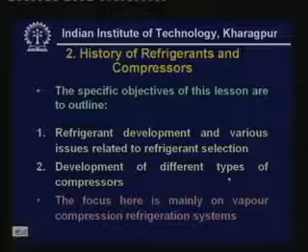The specific objectives of this lesson are to outline refrigerant development and various issues related to refrigerant selection and development of different types of compressors. Here the focus is mainly on Vapour Compression Refrigeration Systems, which are the most popular among all the refrigerant systems.

At the end of the lesson, the student should be able to list various refrigerants used before CFCs and their limitations, list various CFCs and their impact on refrigeration and environment, list refrigerants in use after the Montreal Protocol, and list various types of compressors and their development.

Refrigerant - first of all, let me define refrigerant. A refrigerant is defined as any body or substance that acts as a cooling medium by extracting heat from another body or substance. This is a general definition of refrigerant, and under this broad definition, many substances can be called refrigerants. For example, if you are using a block of ice for cooling, then the ice can be called a refrigerant.

But since we are interested mainly in closed refrigeration cycles, for us refrigerant means a working fluid that undergoes cyclic changes during the operation of a refrigeration system. So basically we are dealing with working fluids which undergo cyclic changes.

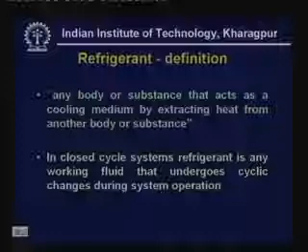Now let us look at the importance of refrigerant selection. In the design of any refrigerant system, selection of a suitable refrigerant is a very important step, and it is in fact the first step in the design of any refrigerant system. Even though the theoretical efficiency of a Vapour compression refrigeration system depends mainly on the operating temperatures, the selection of a refrigerant decides many other practical issues.

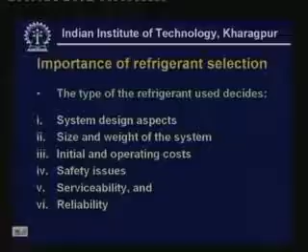For example, the type of refrigerant used decides the system design aspects, size and weight of the system, initial and operating costs, safety issues, serviceability, and reliability. So you can see that so many practical issues are related to the selection of refrigerant. That is the reason why suitable refrigerant selection is very important.

Now let us look at refrigerant development. The development can be divided into three distinct phases. The first phase is the development of early refrigerants, prior to CFCs. The second phase consists of development of chlorofluorocarbon or CFC based refrigerants, and the third phase is refrigerants after the Montreal Protocol.

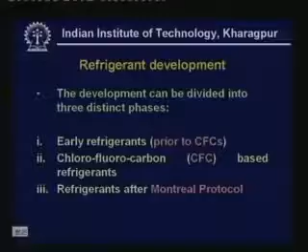Let us look at early refrigerants. As I mentioned in the last class, ethyl ether is the first refrigerant to be used by Jacob Perkins and others in their early refrigeration machines. Ethyl ether was used not because it is an ideal refrigerant, but because it exists as a liquid at ambient conditions, so it is easier to handle. That is the reason why it was used as a refrigerant.

But if you remember, I mentioned that ethyl ether has several problems. For example, if you want low temperatures, then your system will be operating under vacuum, and operation under vacuum can lead to leakage of air into the system, which may form explosive mixtures with ether. So that is one of the main disadvantages of ether. In addition to that, ether is also toxic.

As a result, people tried to develop new refrigerants which do not have these shortcomings. So Alexander Twining proposed the use of ammonia and carbon dioxide as refrigerants in 1850, and ammonia is one of the most important refrigerants because of its excellent thermodynamic properties and low cost, and also because it is easily available.

Next, Charles Tellier tried dimethyl ether in 1864. Dimethyl ether has a low normal boiling point. However, it is also toxic. As a result, that was also not used for a long time.

Next, Raoul Pictet suggested the use of sulfur dioxide. In fact, he built several systems using sulfur dioxide. Sulfur dioxide is not an inflammable substance; in fact, it is a flame retardant. In addition, it also has the advantage that it acts as an auto lubricant, so when using sulfur dioxide in a compression system, you do not need any external lubricant.

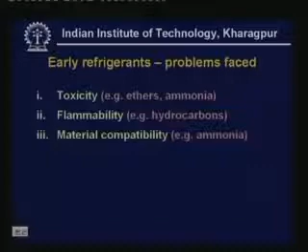They had the problem of flammability, particularly with hydrocarbons. Hydrocarbons are highly flammable, so this is one of the problems. And material compatibility - ammonia is not compatible with copper, brass, etc. So you cannot use these materials when you have ammonia in the system.

Then chemical stability - as I mentioned, refrigerants like sulfur dioxide react with water and form sulfuric acid. So sulfur dioxide is not chemically very stable.

Then operating pressures - this is one typical problem with carbon dioxide. Its operating pressures are at least one order of magnitude higher than other refrigerants. That means your system pressures will be very, very high, so you have to design the system to withstand such high pressures. This is one disadvantage of carbon dioxide.

Then limited temperature range - almost all the refrigerants had a particular temperature range within which they were working, and outside that range they were not good. So these are the typical problems of all the early refrigerants.

As a result, the refrigeration industry felt that to make progress, they needed to develop refrigerants that were safe, non-toxic, non-flammable, etc. They felt that because of safety issues, the growth of the refrigeration industry was not as much as it should be. This led to the invention of CFCs.

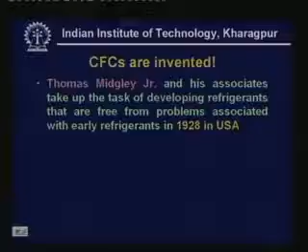Thomas Midgley Jr. and his associates working at Frigidaire Laboratories were asked to develop new safe working fluids to be used as refrigerants in refrigeration systems. Thomas Midgley was already famous for his invention of tetraethyl lead, which was an important anti-knock agent. So he was asked to develop safe refrigerants.

So what he did was carry out a systematic study of the periodic table, and he started eliminating the elements which were found to be not volatile, which were found to be toxic, which were found to be flammable, which were found to be inert. By this process of elimination, he finally was left with 8 elements.

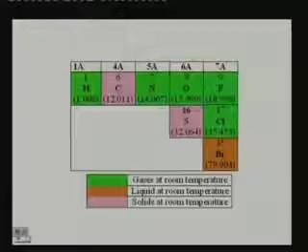You can see here the 8 elements are hydrogen, carbon, nitrogen, oxygen, fluorine, sulfur, chlorine, and bromine, and the colors indicate their condition at room temperature. For example, green means these elements exist as gases at room temperature, red shows that bromine is a liquid at room temperature, and pink - for example carbon and sulfur - means they are solids at room temperature.

After this systematic elimination and study of the periodic table, they arrived at 3 important conclusions. The first conclusion is that flammability reduces from left to right - hydrogen is highly flammable, and as you move from left to right of these 8 elements, the flammability reduces. This is one important conclusion.

The second conclusion is that toxicity reduces as you go from bottom to top. That means bromine is highly toxic, and the toxicity reduces as you move up.

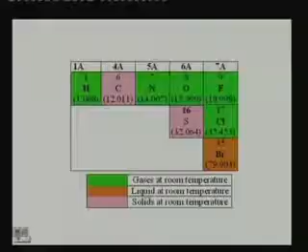The third conclusion is that all the refrigerants available at that time were made out of a few elements from these 8 elements only. That means if you want to make some refrigerant, you have to choose some elements among these 8 only. These are the main conclusions arrived at by Thomas Midgley and his associates.

After this elimination process, they started developing a series of refrigerants by a partial replacement of hydrogen atoms in hydrocarbons. This is how the CFCs were invented.

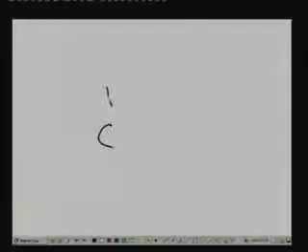For example, let me show this typical methane atom. If you replace these hydrogen atoms with, say, 2 chlorine atoms and 2 fluorine atoms, you get CCl2F2. This is one important refrigerant, known by its number as R12.

If instead of 2 chlorine atoms I replace this chlorine atom with another fluorine atom, I get what is known as R13. This is another important refrigerant.

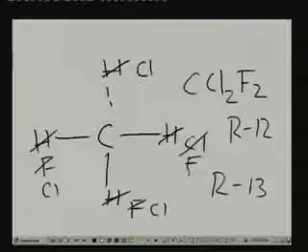If 2 more fluorine atoms are replaced by chlorine atoms, that means we have CCl3F. This refrigerant is known as R11.

So by replacing hydrogen atoms with either chlorine or fluorine, you get a series of different working fluids, and they have shown that by this process you can evolve a large number of refrigerants whose properties are dramatically different from each other, and they have shown how properties like toxicity, flammability, normal boiling point etc. can be controlled or varied by varying the chemical composition.

This is the basis behind the development of several CFCs, and out of this development came the first refrigerant known as Freon 12 or CCl2F2. This was introduced in 1931, and Freon is the trade name of all the refrigerants manufactured by DuPont Company of USA. Freon 12 is the first CFC refrigerant introduced into the market, and it is one of the most important refrigerants, widely used in domestic refrigerators and small air conditioning systems.

The next refrigerant to come out of this is Freon 11, with chemical composition CCl3F, normally used for air conditioning in large plants and also as a foam blowing agent in insulations. The next important refrigerant is Freon 22, with chemical formula CHClF2, very widely used as a refrigerant in air conditioning systems.

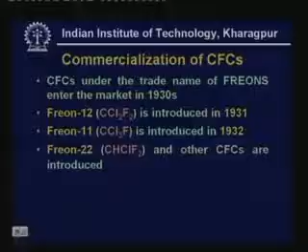After this, a host of refrigerants have followed by the modification of hydrocarbons. All these 3 freons, R11, R12 and R22, are derived from methane. Of course, you can also have other refrigerants derived from, say, ethane. So one can have a large number of refrigerants derived from saturated hydrocarbons.

Since so many refrigerants were introduced, a numbering system was introduced to identify the refrigerants from its number. That's why Freon 12 is called R12, and the number 12 has significance; if you follow the numbering system, you can tell the chemical composition just by looking at the number. These issues I will discuss when we discuss refrigerants in a later lesson.

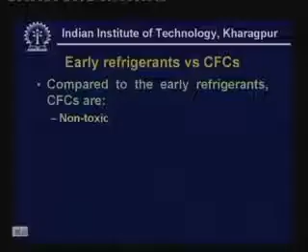Now let us look at how CFCs compare with the early refrigerants. Compared to the early refrigerants, CFCs are non-toxic, non-flammable, chemically stable, compatible with common materials, and available for a wide refrigeration temperature range. So you can see that almost all the perceived problems of the early refrigerants were eliminated by the invention of these new working fluids.

In fact, the non-toxicity and non-flammability of these refrigerants used to be demonstrated by Thomas Midgley. He used to take a mouthful of the refrigerant and blow it over a burning candle, and the flame used to get extinguished. That's how he used to say it is non-toxic, because even after inhaling there is no problem, and it's non-flammable because the flame used to get extinguished.

Soon these refrigerants became very popular and were used very widely because of all these favorable properties. Now let us look at the impact of CFCs.

First impact is that all early refrigerants except ammonia are replaced by various CFCs. Ammonia could not be replaced because of its excellent properties. Then there is a rapid growth in refrigeration due to the safe nature of these refrigerants, and refrigeration has entered households mainly due to the invention of CFCs, with household items like refrigerators and air conditioners becoming very popular all over the world.

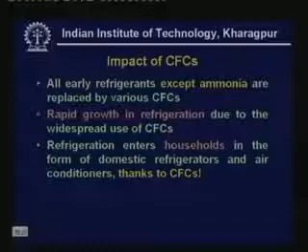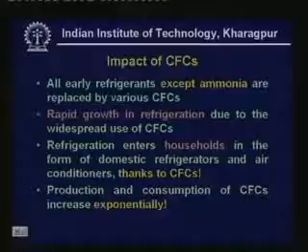As a result of this, the production and consumption of CFCs increased exponentially. Suddenly a lot of manufacturing plants came up manufacturing CFCs. And as I mentioned, every company used to have their own trade name. For example, the DuPont company called their refrigerants Freons, and the General Electric company called them Genetrons.

As a result of all these favorable properties, refrigerants based on CFCs have been used very widely for almost 50 years, and everybody felt they had finally got a safe refrigerant. But suddenly something happened: in 1974 two scientists, Rowland and Molina, proposed a theory of ozone layer depletion. Their theory says that CFCs, if released into the atmosphere, will lead to the depletion of the ozone layer.

So let us look at what this ozone layer is and how CFCs lead to ozone layer depletion. Earth is surrounded by a stratosphere which extends from 15 kilometers to 50 kilometers above its surface, and this stratosphere has a layer of ozone. So how is this ozone formed? Let us look at the equations here.

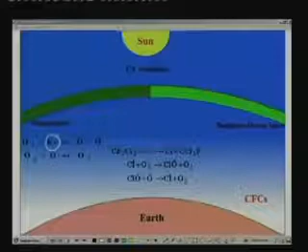Oxygen in the ozone layer reacts under the action of ultraviolet rays. Sun emits a wide variety of radiation, and ultraviolet rays are one among them. Under the action of ultraviolet rays, an oxygen molecule splits into two radicals of oxygen. One radical of oxygen reacts with one molecule of oxygen, forming one molecule of ozone. So ultimately, three molecules of oxygen react reversibly to form two molecules of ozone, resulting in the presence of ozone in the stratosphere.

This ozone layer is very important for survival of life on Earth, because the sun emits ultraviolet radiation, and ultraviolet radiation is harmful to life. We will see the harmful effects of this ultraviolet radiation. Thanks to the presence of the ozone layer, we don't get much ultraviolet radiation, and that is how life has evolved. Scientists say that life evolved only after the ozone layer formed in the stratosphere.

Now let us see the effect of chlorofluorocarbons. As I mentioned, one of the favorable properties of CFCs is their high chemical stability. So when these chlorofluorocarbons are released into the atmosphere, for example due to leakages or when servicing the systems, they stay in the atmosphere for a long time. That means they don't break down or dissociate into atoms - a CFC molecule stays as a CFC only. Over a long period, due to concentration difference, the CFC molecule slowly migrates to the stratosphere.

Once it goes to the stratosphere, it encounters ultraviolet radiation, which has high energy, causing dissociation of the chlorofluorocarbon. For example, one R12 molecule under the action of ultraviolet rays releases one chlorine radical. This chlorine radical reacts with ozone, forming chlorine monoxide (ClO) and one molecule of oxygen. The chlorine monoxide then reacts with one oxygen radical, forming one molecule of oxygen and one radical of chlorine. So in this process, one mole of chlorofluorocarbon has destroyed one mole of ozone and formed oxygen.

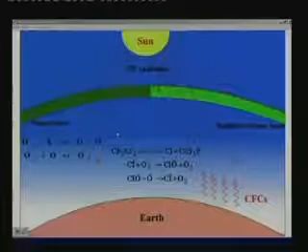So now that is what is shown here: the CFCs are released from the earth and slowly migrate to the stratosphere, where they dissociate the ozone molecules. As a result, on the greenish side where the ozone layer is depleted, more UVB radiation passes through and reaches the earth, whereas where there is no hole, less UVB radiation comes to the earth. This is the principle of ozone layer depletion.

Subsequently, experimental studies have been carried out, and they found that the theory proposed by Rowland and Molina is actually true - they discovered large ozone holes on Antarctica, for example.

It is found that not all chlorofluorocarbons are equally capable of destroying the ozone layer. So based on this observation, they started rating chlorofluorocarbons based on ozone depleting potential, or ODP. For this they have taken R11 or CFC11 as the basis, and CFC11 has been assigned an ODP of 1, with all other refrigerants rated against this reference.

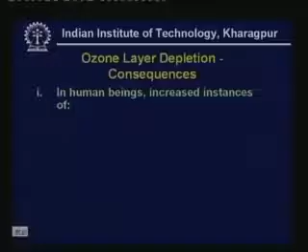Now let us look at the consequence of ozone layer depletion. It is observed that if the ozone layer depletes and ultraviolet radiation reaches earth, it leads to skin cancer, cataracts, weakened immune system, and destroys DNA structure. All these problems take place in human beings, and it also has adverse effect on crop yield, and on terrestrial and aquatic ecosystems.

People suddenly realized that ozone layer depletion is a global problem, and a very serious one. So in 1987 several industrialized nations met in Montreal and proposed a protocol to ban all ozone depleting CFCs in a phase-wise manner. Initially only industrialized nations joined, but subsequently almost all countries of the world have ratified this protocol. As a result, it has been agreed to completely ban the use of all chlorofluorocarbon based refrigerants. Since you are banning them, you require a safe refrigerant, so again a search for safe refrigerants has started all over.

In addition to the ozone layer depletion problem, there is also another environmental problem related to the presence of CFCs in the atmosphere. This problem is known as global warming or greenhouse effect.

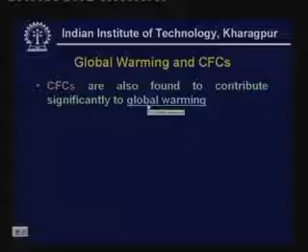Let us look at global warming and the principle or concept behind it. Earth is surrounded by an atmosphere consisting of several gases such as carbon dioxide, nitrogen, oxygen, water vapor, etc. Some of these gases, such as carbon dioxide, nitrous oxide or oxides of nitrogen, and water vapor, act as greenhouse gases.

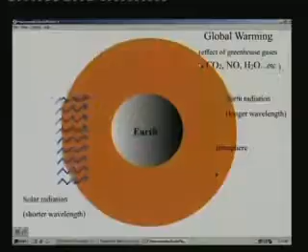Solar radiation mainly consists of short wave radiation, and the atmosphere allows this short wave radiation to pass through and reach the earth. The earth's surface absorbs this radiation, its temperature increases, and the earth in return emits long wave radiation. So the sun emits short wave radiation and the earth emits long wave radiation, and it is these greenhouse gases that allow short wave radiation to enter but absorb the long wave radiation, trapping heat within the atmosphere, so the equilibrium is achieved at a higher temperature.

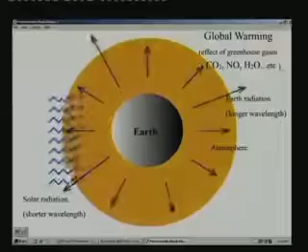Because of the presence of these greenhouse gases, a warm blanket develops around the earth, and this warm blanket is very essential for life on earth. Theoretical calculations show that in the absence of these greenhouse gases, the earth's temperature would be about -18 degrees centigrade, and no living being can survive at such temperatures. So global warming is very much essential for us, but unfortunately the ecosystems are very sensitive to atmospheric temperature, and this temperature, in the absence of any artificial additives, is just right for our survival.

But because of the large scale presence of CFCs, this greenhouse effect or global warming effect is getting disturbed. This happens because chlorofluorocarbons, released into the atmosphere during leakage or servicing, are capable of absorbing much more long wave radiation compared to conventional greenhouse gases such as carbon dioxide. To denote the potential of these gases for absorbing long wave radiation, carbon dioxide is taken as the reference, and carbon dioxide has been given a global warming potential of 1.

On this scale, it is observed that CFCs have global warming potential of several thousands. That means one molecule of CFC is equivalent to several thousand molecules of carbon dioxide. So you see that when you release a lot of CFCs into the atmosphere, it is equivalent to releasing a large amount of carbon dioxide into the atmosphere.

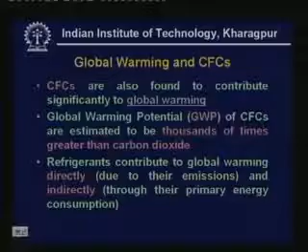For example, if there are two systems and one consumes less energy and the other consumes more energy, the system consuming less energy releases less carbon dioxide into the atmosphere, and the system consuming more energy releases more carbon dioxide. So you can see that efficiency comes into picture, and ultimately the contribution to global warming increases with the inefficiency of the system. So these are the two effects, and another index called Total Equivalent Warming Impact, or TEWI, has been formulated to account for both the direct and indirect effects of global warming.

Now let us look at the effects of global warming on our ecosystem. It is observed that due to global warming, if the temperatures change, there will be unpredictable changes in weather and wind flow patterns.

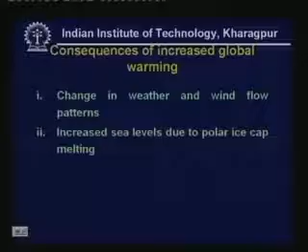This will also give rise to increased sea levels, because the higher temperatures will lead to more melting of polar ice caps. As a result, the sea levels will increase, and once the sea levels increase, there is every possibility that many of the lowland countries may get submerged. So this is a very serious problem.

The third effect is that due to the varying or increased temperature, there will be a redistribution of crops and animals. So all these problems are of a serious nature, as a result of which global warming has become a very major concern for the global community.

In fact, you might have read in the newspapers, in the Kyoto Protocol and similar discussions, several industrialized nations have met and discussed ways and means by which global warming gases can be reduced, meaning the release of global warming gases can be reduced. Of course, in addition to CFCs, other gases also contribute to global warming potential, so the problem includes other aspects also.

So as a result of the negative side of CFCs with reference to their effect on ozone layer depletion and global warming, most of the refrigerants have to be banned. So again, you have to find some safe refrigerants, and now people have become wise - for them now safety doesn't mean personal safety only, but also environmental safety. So the new refrigerants must be environment friendly, and they also must be energy efficient.

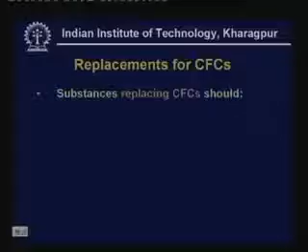So what are the requirements in the context of the Montreal Protocol and subsequent protocols? Any refrigerant which should be a replacement for CFCs has to be non-ozone depleting - that means its ozone depleting potential must be 0 - and it should have as low global warming potential as possible.

People have again found several synthetic refrigerants which meet these criteria. These synthetic refrigerants have 0 ODP but some GWP. People have also looked again at the natural refrigerants which were used earlier and phased out due to some problem or other. So right now you have non-ozone depleting synthetic refrigerants and also natural refrigerants with 0 ozone depleting potential. Some of the early refrigerants, such as carbon dioxide and hydrocarbons which were phased out, are coming back because of their favorable effect on the environment.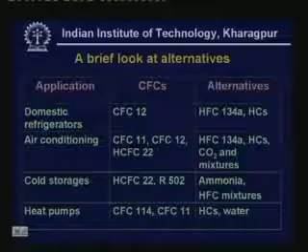So this is just a brief look at the possible alternatives to the CFC refrigerants, and most of the CFC refrigerants such as CFC 11, CFC 12 have already been banned, whereas refrigerants such as HCFC 22, since it has a very low ozone depleting potential, people have felt we can use it for a little longer. That means you can use it up to say 2020, and it has to go by 2020.

So this is a brief look at the development of refrigerants and how we have made a full circle, starting with natural refrigerants, and again we are coming back to natural refrigerants.

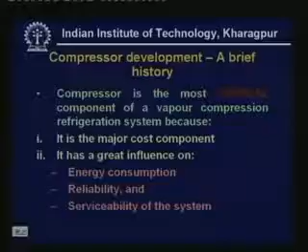Now let us look at another very important aspect: compressor development and a brief history of compressor developments. The compressor is the most important and most critical component of any vapor compression refrigeration system. In fact, it is called the heart of a vapor compression refrigeration system. This is because it is always the major cost component of any vapor compression refrigeration system, typically 30 to 40% of the total plant cost. So it is very important that you select the right compressor, as it has a great influence on energy consumption, reliability and serviceability of the system. So selection of a suitable compressor is another important step apart from the selection of a suitable refrigerant.

Now, compressor types. There are a wide variety of compressors. Let us look at these different types of compressors. Compressors can be classified into positive displacement type compressors.

In positive displacement type compressors, compression is achieved by trapping a certain amount of refrigerant or gas in an enclosed space. First you trap some amount of refrigerant in an enclosed space and then you reduce the volume. As you reduce the volume of a fixed mass of gas, its pressure rises, till the pressure exceeds or equals that of the condenser pressure. This is the principle of positive displacement type compressors.

Under positive displacement type compressors, we have several types: reciprocating compressor, rotary compressor, screw type compressor, and scroll compressor. Apart from that, there are also other types like trochoidal compressors, which are relatively new. So reciprocating, rotary, screw and scroll are the most important types of positive displacement compressors.

The other type of compressor is known as the rotodynamic type of compressor. In all positive displacement type compressors, on a microscopic level the flow is not steady; in fact, the flow is pulsating. This leads to vibrations because of the pulsations. However, on a macroscopic level, due to the high speed, you do not really feel that the flow is pulsating.

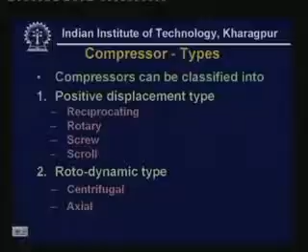Now, let us look at the reciprocating compressor. A reciprocating compressor is called the workhorse of the refrigeration industry, meaning it is the most popular among all the refrigerant compressors. So let me explain the working principle briefly.

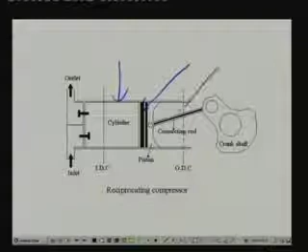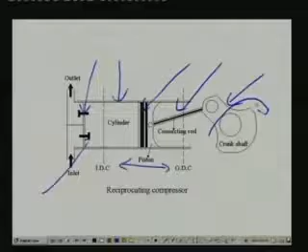A reciprocating compressor resembles in many ways an IC engine. So here you have a cylinder, a piston, connecting rod and a crankshaft, and you have a discharge valve here and a suction valve here. As this crankshaft rotates in this manner, the piston slides in the cylinder, so the piston reciprocates as the crankshaft rotates. You are converting the rotating motion of the crankshaft into a reciprocating motion, that is why you call it a reciprocating compressor.

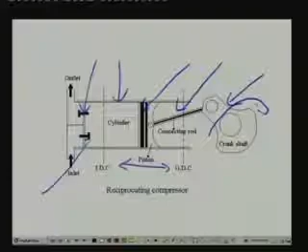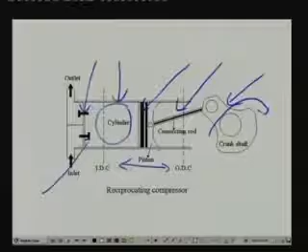As I was mentioning, this is a positive displacement type of compressor. So you have to have an enclosed space and you reduce the volume of that space. Here the enclosed space is formed by the cylinder, the piston and the two valves. When the two valves are closed, you have an enclosed space here. If you trap some amount of gas here and reduce the volume by moving the piston in this direction, the volume reduces and pressure builds up. So the working principle is like this.

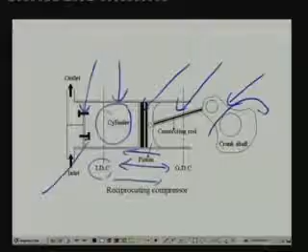Let us assume that initially the compressor is at the inner dead center, that means the piston is at this position. As the crankshaft rotates, the piston moves towards the outer dead center, or ODC. As the piston moves towards the outer dead center, there will be expansion of the gas inside the cylinder, hence the cylinder pressure drops. When the cylinder pressure drops, due to the pressure difference between the evaporator and the cylinder, the suction valve opens. Once the suction valve opens, refrigerant from the evaporator flows through this inlet and enters the cylinder. This process continues as long as the piston is moving towards the ODC.

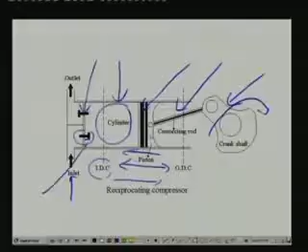Once it reaches ODC, the further rotation of the crankshaft leads to movement of the piston in the reverse direction, that means now the piston starts moving from the outer dead center to the inner dead center. When it starts moving in this direction, the pressure starts rising because the volume gets reduced. As this pressure exceeds that of the evaporator pressure, the suction valve closes, and the discharge valve is also closed now. So both suction and discharge valves are closed, and as the piston moves, the volume reduces and pressure builds up.

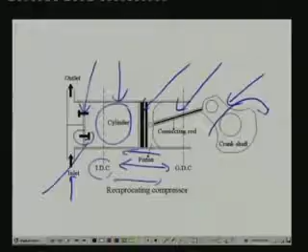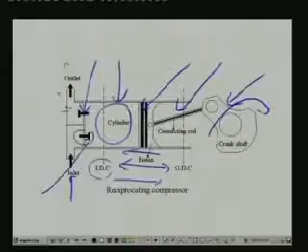Once this pressure exceeds the pressure of the condenser, the discharge valve opens. So the refrigerant trapped inside the enclosed space escapes through this discharge valve, goes to the condenser, gets condensed, then flows through the expansion valve, goes to the evaporator, and the cycle is completed. So the movement of the piston inside the cylinder gives rise to suction and compression, and as you can see, the flow is not steady. At some point refrigerant enters, at some point it gets compressed, and at some point it gets discharged. If you put a very fine probe here, you find that the flow is pulsating. So this is the basic principle of any reciprocating type of compressor.

So now let us look at the developmental issues regarding the reciprocating type of compressor.

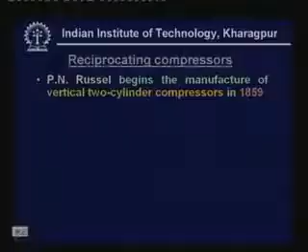P.N. Russel began the manufacture of the first vertical two-cylinder compressor in 1859. This is the first commercialization of compressors, and as the name implies, it was vertical and had two cylinders. Charles Tellier developed a horizontal single-cylinder compressor in 1863.

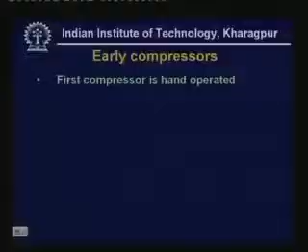Now let us look at the early compressors. What are their characteristics? The earliest compressor was hand operated. To run a compressor, you have to supply some mechanical energy, meaning some drive is required. In the first compressors, this drive was provided by a human being, just like our normal water bore wells.

Later, hand operated compressors were replaced with steam engine driven compressors, sometime in the 1850s. The early compressors were essentially open type, meaning the body of the compressor and the driving mechanism were separate. For example, if it was a steam engine, the steam engine and the compressor were separated. This is what is known as an open type compressor.

They were typically very low speed compressors, about 50 rpm, and their size used to be very large. For example, they used to have diameters as large as 0.5 meters, and the stroke length used to be as large as 1.2 meters.

Since the speed is low and the size is large, typically they used to have small clearance. We will discuss the effect of this clearance when we discuss the performance of reciprocating compressors. But for now, let me say the early compressors had small clearance and large valves. As a result of this low speed and large valves, they were able to handle a mixture of liquid and vapor. So early compressors were handling refrigerant liquid plus vapor mixtures.

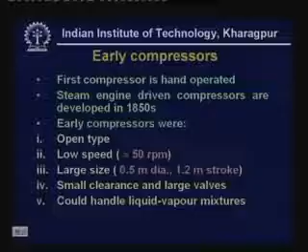Now let us look at some important landmarks. In 1897, a Belgian scientist, John Lebrun, introduced a rotary stuffing box to reduce leakage. One problem with open type compressors is that the driving shaft goes into the body of the compressor, and where it enters, you must provide some kind of sealing so that it can rotate freely, while refrigerant leakage is minimized.

This is a typical problem with any open type compressor, because of this arrangement there will always be some leakage of refrigerant near the shaft. People tried different types of seals to minimize the leakage. It's not possible to prevent it completely, but you can minimize it. The first breakthrough happened when Lebrun introduced a rotary stuffing box, which could reduce refrigerant leakage to a large extent.

Then gradually the steam engine driven compressors were replaced with electrical motor driven compressors. This is a truly landmark event in the development of compressors, because once you use electrical motors for running compressors, it offers many advantages - you can have higher speed, compact design, and many other important advantages. This happened, and then high speed compressors, meaning speeds above 500 rpm, were introduced in the 1920s.

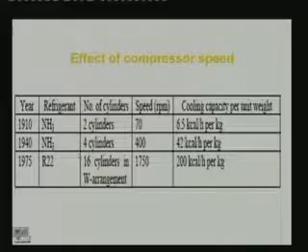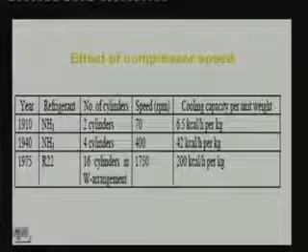For example, in 1910 we had an ammonia based compressor which had 2 cylinders and was running at 70 rpm, giving a cooling capacity of 6.5 kilocalorie per hour per kg of the weight of the compressor. In 1940, ammonia compressors used to have 4 cylinders and the speed used to be 400 rpm. So you can see the cooling capacity per kg of compressor weight increased from 6.5 to 42 due to the increase in speed and also the increase in the number of cylinders.

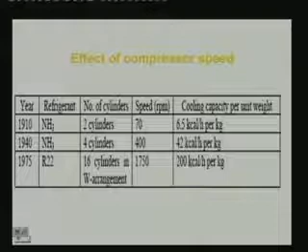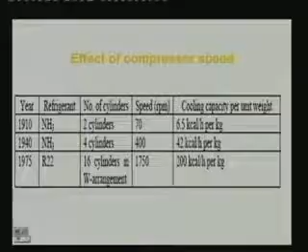Whereas in 1975 a typical R22 compressor with 16 cylinders and a speed of 1750 rpm was giving a cooling capacity of 200 kilocalorie per hour per kg. So you can see there is a 2 order of magnitude improvement in cooling capacity with the increase in speed. So if you want to make a compressor compact, one has to go for higher speeds, and all this has become possible due to the use of electrical motors and multi-cylinder arrangements.

Now let us see what are the other important landmarks. A hermetic compressor, which is again a very important landmark in the development of compressors, was introduced in 1918. Now let us see what is a hermetic compressor.

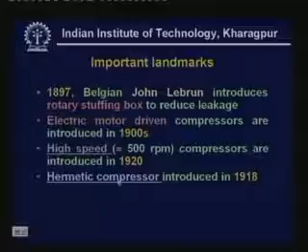As I was mentioning, in an open type of compressor you always have a problem of refrigerant leakage, because the compressor and the motor are placed widely apart and the rotating shaft has to pass through the body of the compressor where the leakage takes place. Now if you have a continuous refrigerant leakage from the system, after some time its performance gets affected. So in systems using open type compressor you have to provide a large refrigerant storage which will take care of the leakage to some extent, but after a certain time you have to recharge the refrigerant into the system.

That means all open type compressors require periodic maintenance. Obviously periodic maintenance is not possible if you are planning to use these compressors in, say, domestic refrigerators. You cannot have regular maintenance in your house. So people felt that this problem of open type compressor has to be eliminated. So this led to the development of a hermetic compressor.

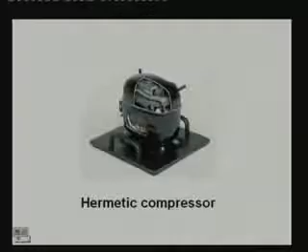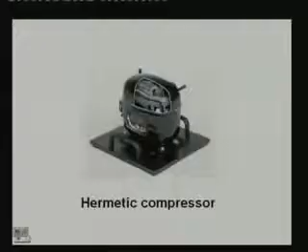So you can see the photograph of a hermetic compressor here. In a hermetic compressor, both the motor and the compressor are housed in the same external housing, that means both are mounted in an external shell. As a result, any refrigerant leakage from the compressor is confined within the shell, and to this shell are attached the suction and discharge lines through a permanent welding or brazing process. As a result, the leakage of refrigerant is completely eliminated.

Because of this important advantage, hermetic compressors have become very important for the development of domestic refrigerators and small air conditioners, etc. Of course, one of the problems with hermetic compressors is that since you are keeping the motor also inside the refrigerant system, the heat losses because of the inefficiency of the motor become a load on the refrigerant system. As a result, hermetic compressors are less efficient compared to open type compressors. So normally you use hermetic compressors in small systems where efficiency is not so important, and use open type compressors in large systems where efficiency is important.

Now let us look at other types of positive displacement type of compressors. One of the major problems with the reciprocating compressor is that you are converting a rotary motion into a reciprocating motion. This will give rise to vibrations and higher noise. As a result, people have tried to use positive displacement machines where you do not have to convert rotary motion into reciprocating motion, and several of these machines have been invented and used in the refrigeration industry.

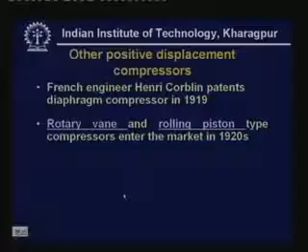The first diaphragm type of compressor was patented in 1919 in France, and a rotary vane and rolling piston type of compressor entered the market in 1920s. I will not explain the working principle of these compressors because we will be discussing these when we discuss compressors, but I will just show the schematic of a rotary compressor.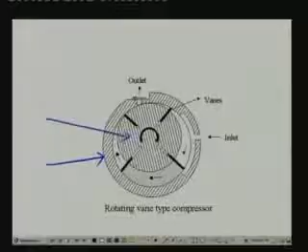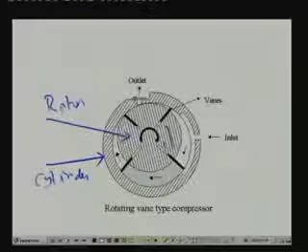This picture shows the schematic of a rotary vane type of compressor, and here we have the cylinder and a rotor, which consists of a different number of vanes. For example, this particular type consists of 4 vanes which are freely supported or spring loaded and kept in slots cut in this rotor. So this is the rotor, and the shaft which rotates is mounted on the rotor, and the axis of rotation of the shaft is in line with the center of the rotor, but it is eccentric with reference to this outer cylinder. As a result of this eccentricity, when this rotor rotates in this direction, it creates a suction and discharge effect within the compressor.

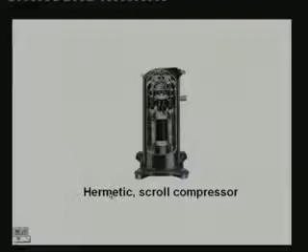Then the scroll type of compressor was commercialized in the 1980s. Scroll type compressors are used in small refrigeration systems, and this picture shows a small hermetic scroll type compressor.

Now let us briefly look at the centrifugal compressor. As I mentioned, a centrifugal compressor comes under the rotodynamic type, and it was first conceptualized by Auguste Rateau of France in 1890. Let me show the schematic of a centrifugal compressor.

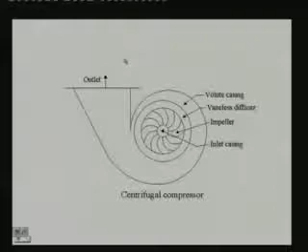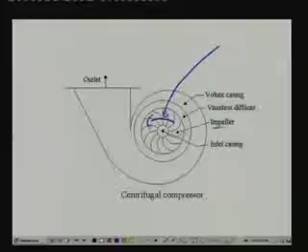This shows the schematic of a centrifugal compressor. You have a fast rotating component, which rotates in this direction or the opposite direction, called the impeller. The gas enters through this inlet casing and fills the space between the impeller blades. As the impeller rotates at high speed, it imparts angular momentum to the gas.

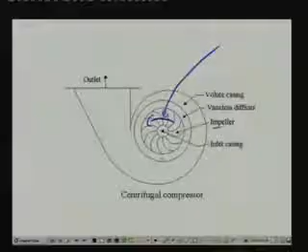The gas gains angular momentum and is thrown out because of the centrifugal action, entering into this vaneless diffuser. In the vaneless diffuser, some part of the kinetic energy is converted into pressure, and from there it enters the outer volute casing. As you can see, the cross sectional area of the outer volute casing gradually increases, so the kinetic energy of the fluid is converted into pressure. Ultimately a high pressure gas comes out of the outlet.

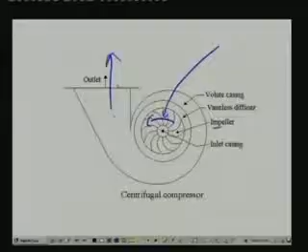This is the basic working principle of a centrifugal compressor, and it is a steady flow device, as I have already mentioned, meaning you get a steady stream of fluid out of the compressor. One advantage of this type of compressor is that since it is a steady flow machine, you do not have many vibrations like you see in a reciprocating type compressor.

As I mentioned, this was conceptualized in 1890, and in the 1920s it was actually perfected by Willis Carrier in the USA, who used these compressors for air conditioning applications to start with. Nowadays these are also used in large refrigeration plants, and there was a rapid growth of these compressors in the 1930s with the invention of CFCs.

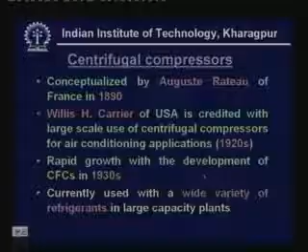Currently, they are used for a wide variety of applications with a wide variety of refrigerants, mainly in large capacity plants. Now let us look at a brief comparison between centrifugal versus reciprocating type compressors.

Compared to reciprocating type, centrifugal compressors are compact for large capacity systems, refrigerant flow is steady, and there is less vibration and wear. Compared to centrifugal compressors, reciprocating compressors are simpler in construction and rugged, and they offer good part load performance.

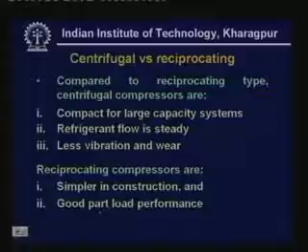As a result, in the refrigeration industry a wide variety of compressors are used for different applications. For small capacity, one normally uses a reciprocating compressor or other positive displacement compressors. For very large refrigeration capacity, one generally uses a centrifugal compressor because it is more efficient and more compact, and the screw compressor comes in between reciprocating and centrifugal. So almost all types of compressors are used in the refrigeration industry for different applications.

So this is a brief history of refrigerant and compressor development. Now let us conclude with what we've learned in this lesson. We have seen that vapor compression refrigeration technology has achieved a high level of maturity, mainly due to the development of a large number of refrigerants and a large variety of efficient compressors for various applications.

Currently, efforts are on to develop eco-friendly refrigerants in view of ozone layer depletion and global warming effects. The focus is on eco-friendly refrigerants for different applications, and the development of more energy efficient, compact, reliable and quiet compressors.

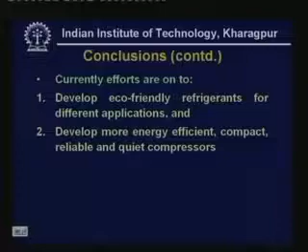There are also other types of compressors, such as the linear piston type, trochoidal type, and acoustic type compressors. These are being developed and are still at various levels of development, and they have certain advantages compared to conventional compressors, but they have not yet been commercialized.